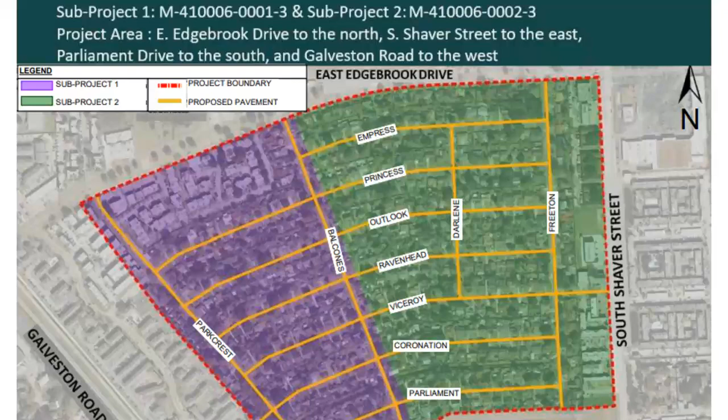Picture this, a colorful mosaic of possibilities awaits us. Imagine Subproject 1 as a vibrant shade of purple, rich with potential and excitement. Today, our spotlight shines brightly on this dynamic segment where every detail, every plan, and every vision comes to life. Let's immerse ourselves in the purple hue of Subproject 1 and explore the endless opportunities it holds.

Houston Public Works is committed to building forward and not building back the same way. This drainage project is for the construction of stormwater drainage, water lines, wastewater lines, paving, sidewalks, driveways, curbs, wheelchair ramps, permanent signs, pavement markings, and street lights. In addition, necessary utility upgrades will also be made.

Aside from minor paving restorations, a proposed 12-inch water line will be constructed primarily by trenchless construction on East Edgebrook Drive, east of Harris County Flood Control District to South Shaver Street. This $21.3 million drainage project is scheduled to begin in spring of 2024 and anticipated to be completed in spring of 2026. The project schedule will depend on weather conditions.

The contractor will work Monday through Saturday from 7 a.m. to 7 p.m. However, extenuating circumstances may require limited work to take place outside of the standard hours. The contractor is SER Construction Partners, LLC, and the project lead is Bashar Khalil.

Upgrades to your community include new storm drainage system, new paving, sidewalks, street lights, and new water and wastewater lines. Ultimately, the purpose of this project is to reduce the potential for structural flooding.

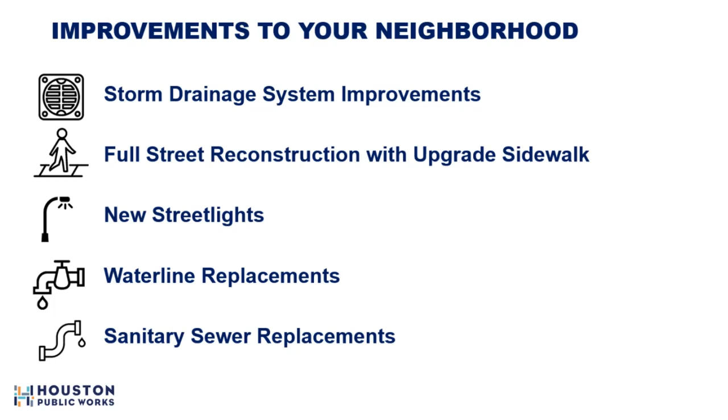Let's crunch the numbers, folks, because what we have here is not just any project, it's a VIP affair. We're talking about a project that's not only important, but downright essential. Let's get excited because this is a VIP, a very important project.

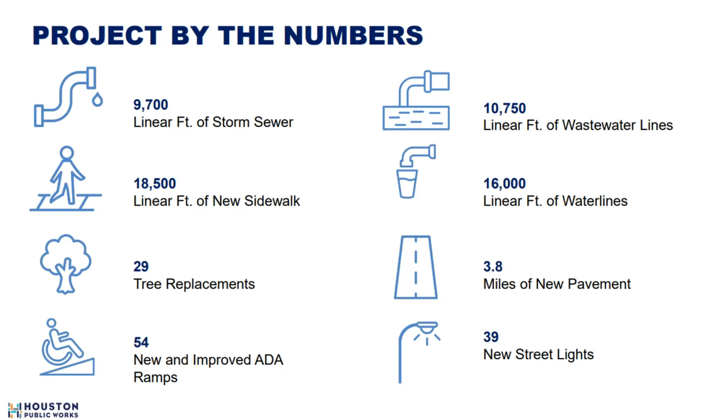This VIP project includes a total of 6 phases. Follow me as we follow this map.

Phase 1 in orange will begin in spring of 2024 to spring of 2024. Phase 2 in yellow will start in spring of 2024 until summer of 2024. Phase 3 in green is from summer 2024 to fall of 2024.

Phase 4 in purple will commence in fall of 2024 to winter of 2025. Phase 5 in blue begins in winter of 2025 to summer of 2025.

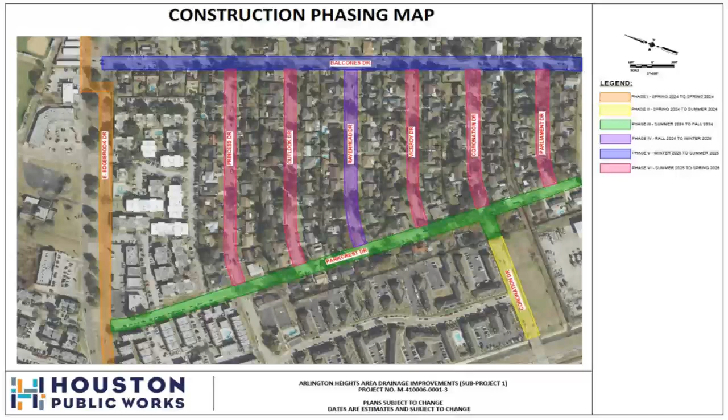Phase 6 in red starts in summer of 2025 and ends in spring of 2026. This phasing map is subject to change if needed.

Let's decipher the language of the seasons, shall we? Here's the lowdown on our construction timeline. When the world is blanketed in winter's chill, January, February, and March.

As the flowers bloom and the birds sing in spring, April, May, and June. When the sun beats down and the days stretch long in summer, July, August, and September. And as the leaves turn golden and the air turns crisp in fall, October, November, and December.

So mark your calendars, folks. We are starting in the spring of 2024, and by the end of spring of 2026, we'll have transformed our vision into reality.

Get ready to embrace the adventure of construction because we've got some pro tips to share. Our motto: organize, don't agonize. Trust us, with a little preparation, time will fly by as we transform your neighborhood.

First, keep your eyes peeled for our friendly door notifications. They're packed with essential contact information for any burning questions or concerns you might have. And hey, if Fido mistakes it for a chew toy, no sweat. Head over to engagehouston.org for all the details.

Safety. Safety first, folks. Let's make sure we're all on the same page when it comes to keeping ourselves and our teams safe during this project. Those construction signs and barriers, they're not just for show. They're there to keep us all out of harm's way.

Remember, safety isn't just our priority, it's priority number one. So let's give those signs and barriers the respect they deserve. Your safety is our safety, and together we can ensure a smooth and secure journey through this construction adventure.

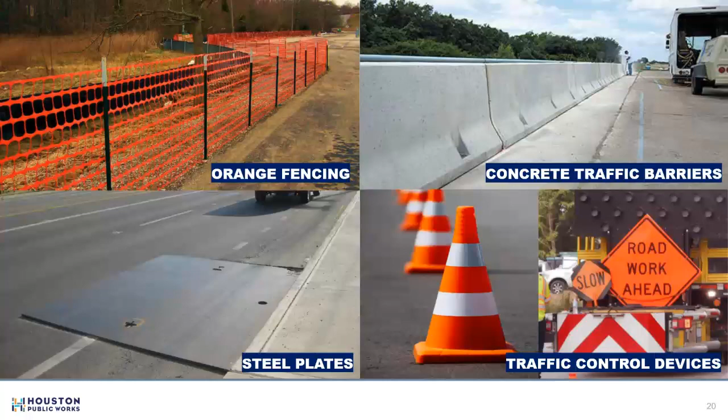Let's be real. Construction isn't exactly a walk in the park, but here's the silver lining: the outcome is worth every bit of the hustle and bustle. Picture this: smoother roads, safer sidewalks, and a community buzzing with newfound energy. That's the reward waiting for us at the end of this journey. So let's keep our eyes on the prize and embrace the journey, because the best is yet to come.

Water. You will lose water and wastewater services for a short period of time when the contractor is making the reconnections. The contractor will provide notice at least 72 hours in advance.

Trees. The tree protection plan identifies the trees to be removed, which includes the removal of diseased or dying trees. The City of Houston identifies trees that can be preserved on a case-by-case basis.

Traffic and driveways. There will be construction vehicles and equipment present throughout the project. The contractor will set up traffic control and detours as necessary throughout the project to best alleviate mobility issues. This project will involve removing and replacing the full area of the right-of-way, which is needed for the contractor to reconnect residents' utilities and install new sidewalks.

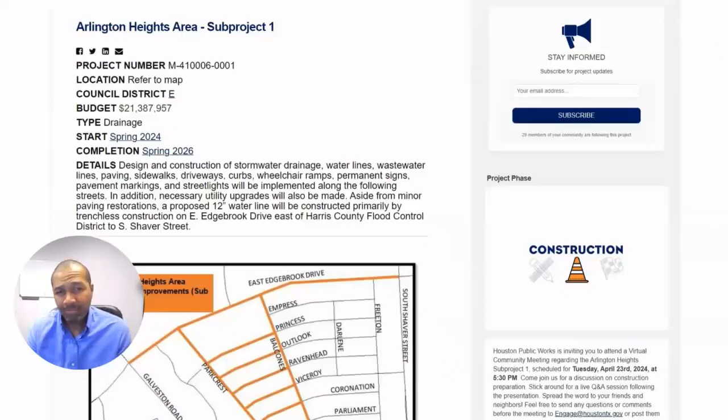As we journey deeper into the project page for Arlington Heights Subproject 1, a tapestry of information awaits. The project number, location, council district, budget, and more. You can also delve into the project through a detailed description. Should you wish to follow this project's journey, a simple act of subscription is all it takes. Enter your email to receive regular updates to your inbox. Navigate through a labyrinth of impacted streets if you should dare. Join us at the live meeting for a first-hand glimpse into the project details.

For deeper knowledge, an assortment of digital documents awaits. From PowerPoint presentations to traffic control plans, immerse yourself in the project's every facet. Visit the FAQ section for project team contact information. Questions, anyone? Our Engage Us tab is here for you to ask any questions you may have.

Moving along to the tabs at the top of the page. Home, projects, in my neighborhood, active projects, completed projects, resources, and about us all await your exploration. And for the explorers looking for specific answers, a keyword search bar is at your disposal.

And with this, my fellow constituents and stakeholders, you are now ready to explore the vast expanse of EngageHouston.org. We look forward to hearing from you. Until next time.

Hey there, community superheroes. Got something on your mind? Don't hesitate to reach out. We're all ears. Whatever it is, through a quick call to 311, a convenient online report, a friendly email, or even through our nifty app, we've made it super easy for you to share your thoughts and concerns. But hey, it's not all about problems. We love hearing about the wins too. If our contractor is knocking it out of the park, we want to know about it. So don't hold back. Let's keep the conversation flowing and make this project a shining success together.